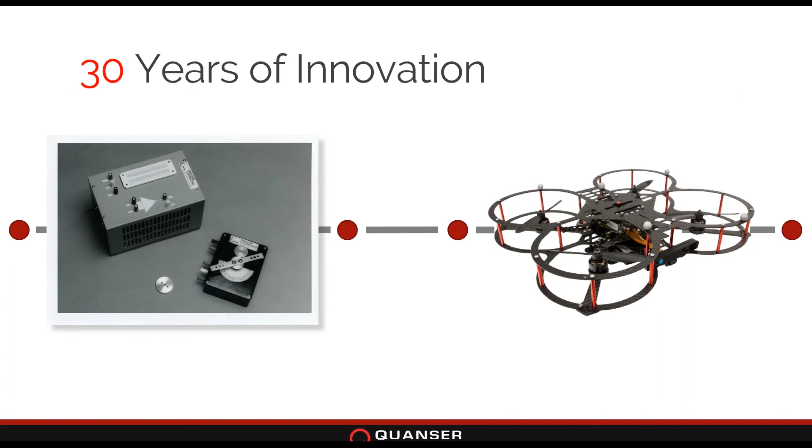That research approach has also been something we've been founded in, in terms of bringing these cutting edge advanced technologies to researchers, to give them effective validation platforms, to take the research they do, their algorithms, their new innovative approaches, and really quickly and easily implement them on hardware platforms without having to worry about creating unnecessary software platforms or tool sets or modules that don't really influence what they want to focus on, but give them the results they expect and are looking for.

And also a way to bring those algorithms easily to emerging trends, whether it be AI or machine learning or Industry 4.0 — things like that, where we're always trying to push the boundaries of what can be done quickly and effectively in the academic space, in terms of bringing in advanced technologies and adapting them to that academic focus to make these academically appropriate solutions.

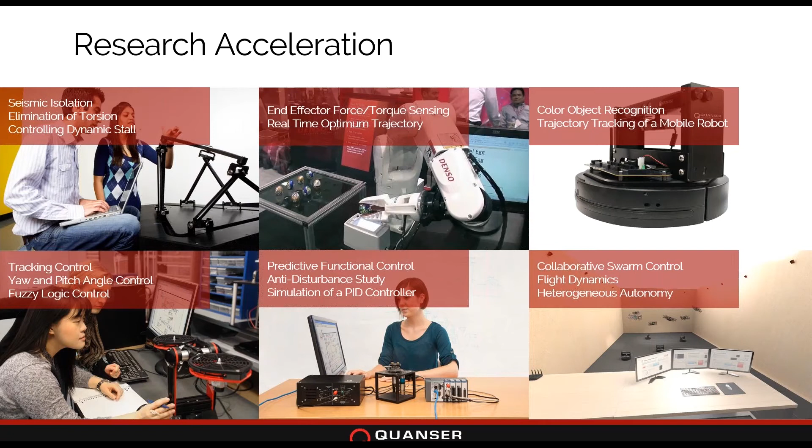But it isn't just in the research space that we push the boundaries. In the academic teaching space as well, we've worked with a lot of partners over the years to bring really advanced pedagogical methods to what they do in their teaching courses, whether it be bringing advanced hardware to early years courses, or new approaches to how content can be presented to different undergraduates in different ways.

I'll talk a little bit about that later on in the presentation, but even how you can change the whole structure of a course or program to really offer meaningful experiences for students, so that they can really understand and connect with the advanced concepts typical in day-to-day engineering life, but from the very early beginnings, so they understand and connect with what engineering is, and carry those experiences through not just their undergraduate career but into their future careers.

Being able to really understand what it is to do engineering and how theory and practical applications come together - this is something we've been doing all over the world for a long time now, 30 years. At this point, I think we're well over 3,500 academic institutions all over the world, with a similar number in the thousands of research papers that have been published using our technologies.

They're fully available on our website if you're interested in how we've had an impact on your particular field of interest. We have them archived and you can take a look through and see how people are using our products to push the boundaries of their particular research interest.

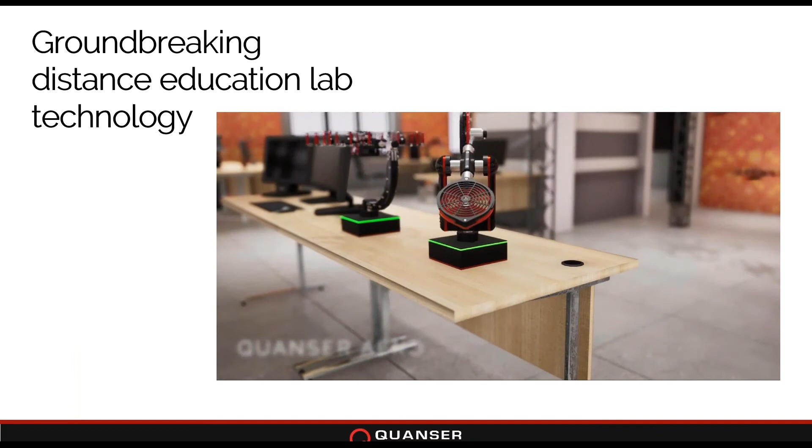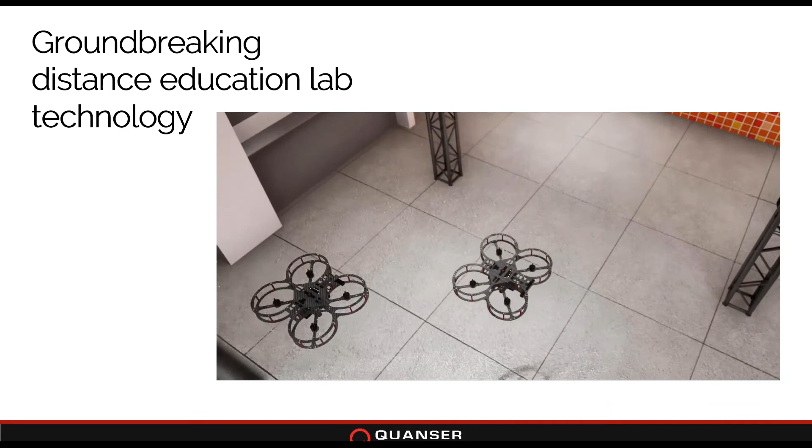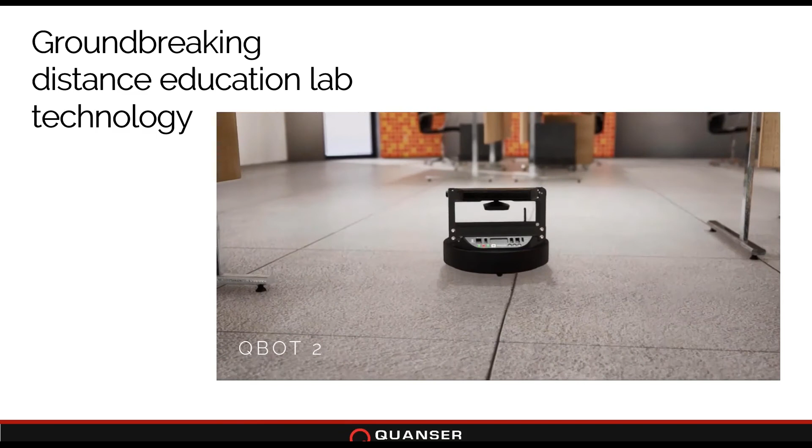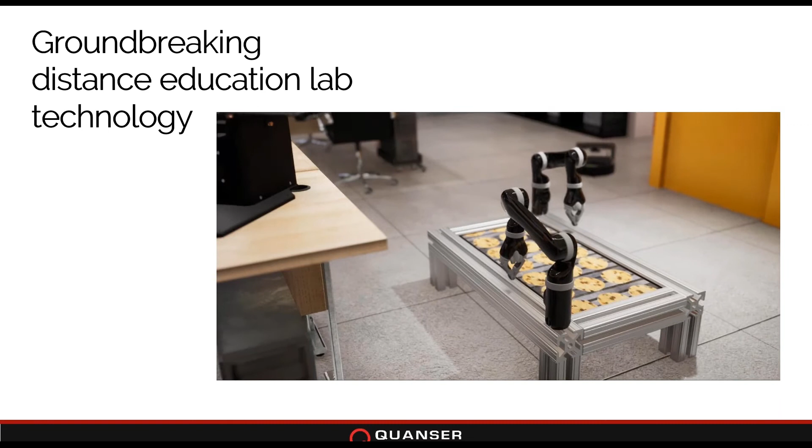The first thing we did was look at our virtual reality technology platform, Quanser Sim, which gives us the ability to represent our hardware very effectively in virtual and mixed reality spaces. Typically what we've done with this technology has been to represent how solutions can be brought together, showing our partners how they can leverage our technology to provide solutions to their students and researchers. But this was basically the most we'd pushed this technology platform. We had the ability to create our systems and work with them in virtual reality, to a certain extent hardware capabilities as well, and the ability to represent them dynamically, which was very important. But we'd never really leveraged this technology in a teaching context or used it effectively in the laboratory space or virtual laboratory space.

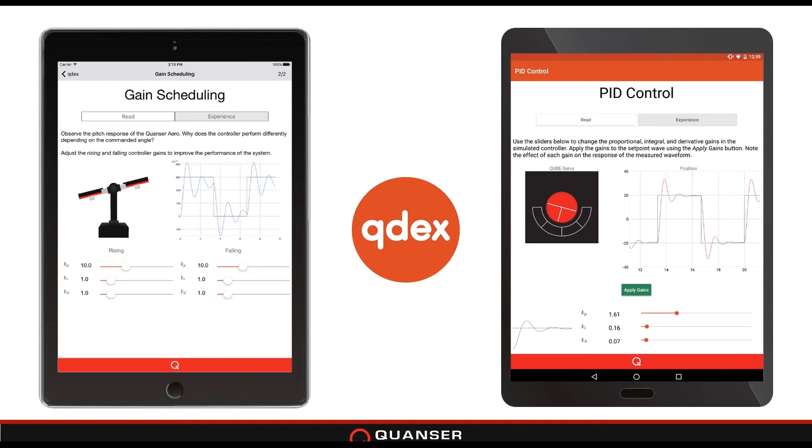The other piece of technology we'd worked on, something I've been a proponent of for the last six or seven years, was our QDEX platform, for bringing traditional engineering content to mobile devices in a really effective, interactive, and engaging way. It takes traditional engineering content and teaching materials that are technologically advanced and theoretically deep, and presents them to students in a context that allows them to understand and engage with those concepts, playing and interacting with them in ways they'd never thought about before, bringing understanding of how these techniques apply to engineering and to real world contexts like industrial applications. We had this technology ready to go, and had used it for a number of partner programs and courses, including building out our mobile textbook, which I'll talk about in a couple of minutes. But other than the mobile textbook, we hadn't really brought this interactive laboratory experience to our students or partners by leveraging this technology. That was the other platform we thought we might be able to leverage for this.

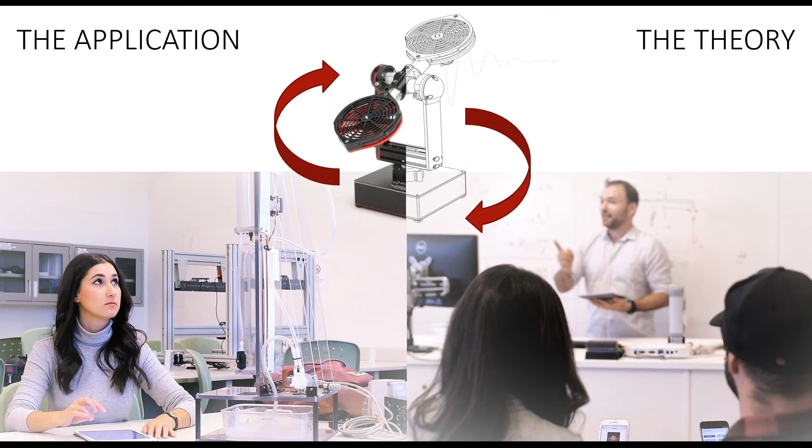Finally, how could we bring those together to do what we always do as a company, which is bridge the gap between theory and practice? That's what we always try to do with everything we create: bring together the theoretical foundations that are part of everything you do in engineering, and the application context of applying those theories to real world hardware, scenarios, and applications. We see how theoretical elements of modeling, dynamics, controls, and algorithms affect real hardware, and how that hardware changes the way those theoretical elements are applied and justify their functionality. So those were the ingredients we had available to bring a solution as quickly as we could to our partners, to address the needs that they had.

And finally, we had this experience controls platform that I mentioned, which was for us a legacy now of being able to bring really advanced and really exciting technological and teaching materials to students. Experience Controls is our control systems textbook that we released last fall, that allowed us to bring what was traditionally one of the elements of the controls course that we thought needed a little bit of a modernization, a little bit of a refresh in terms of how the content was presented to students.

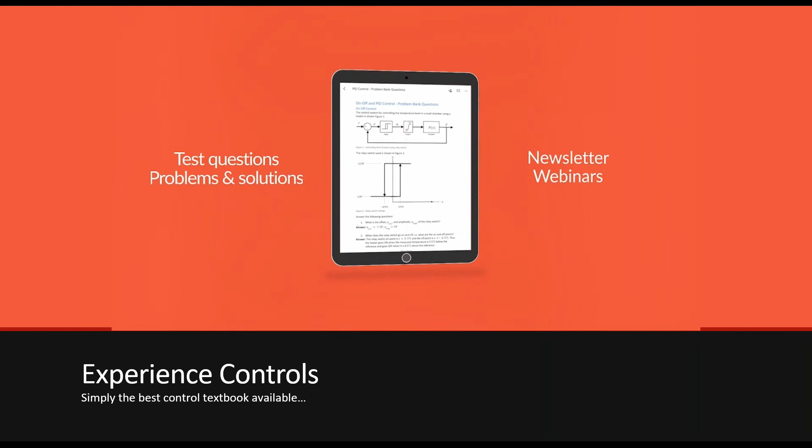So we took the traditional controls course textbook content and ported it to our mobile platform, really enlivened it, enriched it, made it much more interactive for students with simulations, with applications, with the ability to see how those theoretical concepts come alive in these applications. And that had been hugely successful for us.

We've seen over 4,000 student downloads and over 200 or 300 instructor resource downloads from this platform. And so we knew there was a hunger to have this ability to interact with theoretical concepts and really understand them in a meaningful way.

And so that was our foundation, that was our starting point two weeks ago, to try to bring something to the growing need that we were hearing from every available outlet exposed to our customer base, whether it be phones ringing off the hook with no one at the office to answer them, or emails. We know there's a growing surge of need for a solution that can bring those experiences to students in an effective way. And we had all these great ingredients that we knew we could use to deliver something as a really effective solution.

And that's basically the motivation behind what we've created. We've always worked with our customers as colleagues to stand by them and drive everyone towards success, whether it be their students or their researchers or our other academic partners, to be able to deliver something that makes sure everyone succeeds no matter the circumstance, which in these circumstances is a bit of a different challenge, but we had these abilities and assets we knew we could leverage.

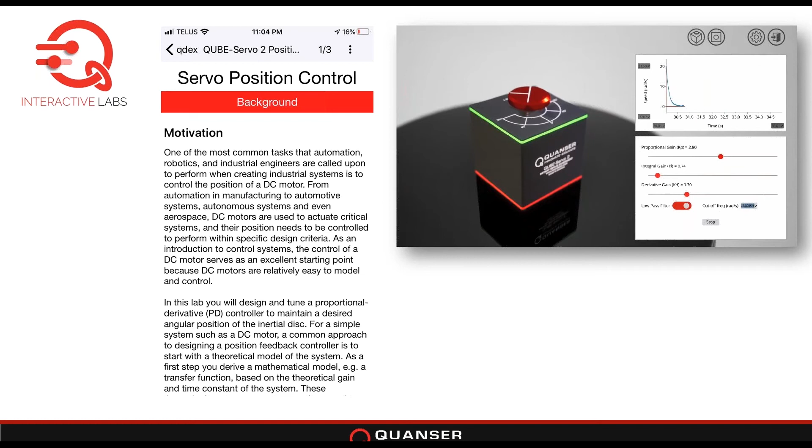We understand our systems very intimately, as you can imagine, through our very rigorous development process. As a controls and mechatronics company, we always try to create models and representations of our systems as effectively as we can, because we have such an intimate understanding of how our systems are built and how they behave.

We can really make these interactive and valid representations of how our systems behave, giving students that hardware experience without actually necessarily being in front of a piece of hardware, especially tuned towards the outcomes we really want them to have in terms of the control outcomes or curriculum outcomes.

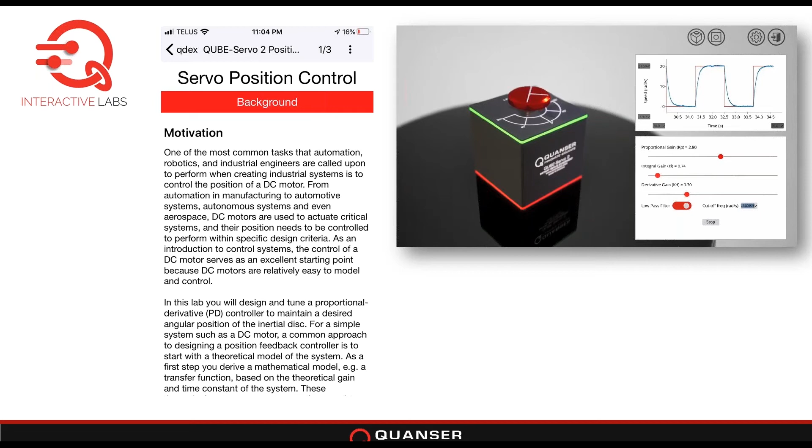We really believe we can effectively deliver some of those aha moments where students see the difference between theory and reality and the effects hardware has on theoretical concepts through this platform, because we've created curriculum that really emphasizes and showcases how these hardware techniques really influence the theories they understand from other resources.

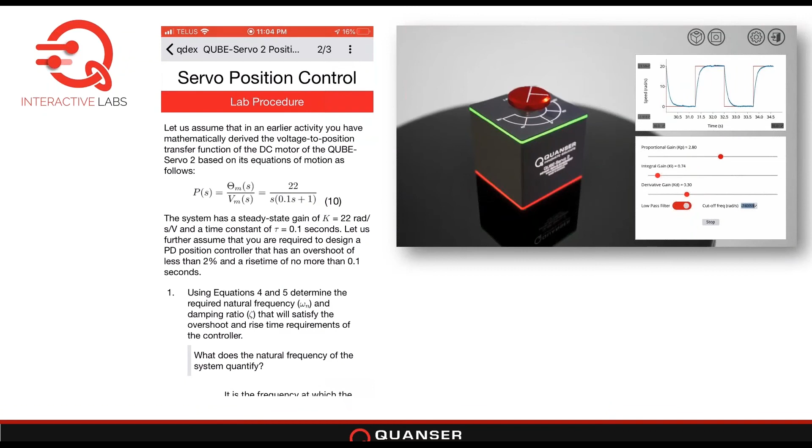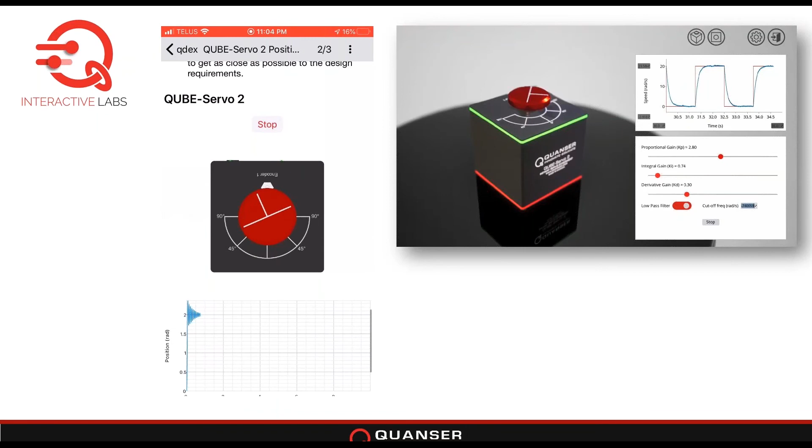And you can see here on the left, we have almost exactly the same experience also on mobile, where they can interact with the curriculum. They can see check-your-understanding questions to make sure they're really following along and understanding the material presented to them. We have assessment questions, so later on they can start to build a lab report showing how they brought those concepts together and understood those outcomes I mentioned.

But then they can interact with a representation of the hardware exactly the same way as on Windows, and hopefully more or less exactly the same way as on actual hardware.

And this really gives them that experience on either platform, across the platforms, and also being able to give students who might not necessarily have PCs or high-end software systems at home the ability to, on their phone, interact with these systems and have these learning outcomes without necessarily needing to be on campus to even access the expensive IT resources that are typically there.

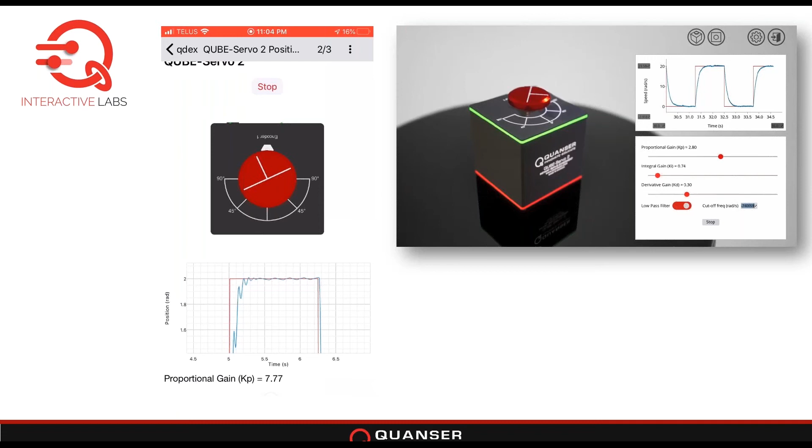And so this, combined with our traditional curriculum, which is fundamentally important to what we do, we've tried to build a complete solution, not just, as you can see with the laboratory experiments that we've built up in terms of being able to do basic controls for modeling position and speed control.

But also an aerospace context for how those controls are applied to aerospace systems with our Quanser Aero. Things like PID tuning, gain scheduling, how PID gains are compared to more advanced topics like state space control. We've built up this collection of bespoke material specifically for this.

This is not the traditional content or curriculum that we create for our other products. This is specifically designed for this context, so we emphasize how hardware influences these controls topics, and that was something we really wanted to consciously do to really make sure that the outcomes that students are getting on this platform are aligned to the outcomes that we would want them to have in a traditional context. And so we've really tried to emphasize those.

But then also, as instructors ourselves, we wanted to also deliver a complete set of instructor material to our partners. So we have solutions for the assessment questions that we have available, implementation guides in terms of some of the ways that you can use this platform for your particular teaching context, and also lecture slides, because we always find that being able to tie lectures to laboratory activities really makes a more continuous and effective presentation of concepts to students.

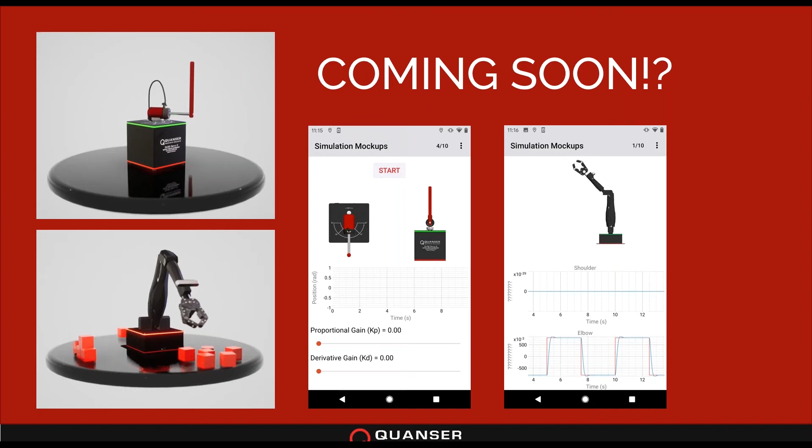From there, again, we have over 80 products, and we'd love to hear from you what you would like us to bring to this platform to address the needs you have and the needs you're seeing in your community, to bring a platform that has a basis in need and a basis of being able to deliver solutions you can see being effective and something you can use immediately for your teaching activities.

So finally, I'll close this part of the presentation in terms of why did we create this platform. First and foremost, we wanted to provide something as quickly as we could to manage the overwhelming set of requests we're hearing from the market and our partners, to deliver something that meets your current need today, right now.

And also something that's scalable, because your needs right now might be for something that has a large audience. So we want to deliver something that is immediately useful, and from there we'll build up the platform to address more needs over time. But right now we just wanted to have something available that you can use today.

At the same time, use it as a starting point. Leverage our content delivery mechanisms, our simulation and virtualization IP, and bring all of our technology foundations together to give these experiences in the context of a very introductory undergraduate laboratory experience, but grow from there. Perhaps offer experiences where researchers can start to use more accurate, more interactive, more open and complete experiences for their topics.

But then also being able to grow from the undergraduate context and the research context to other products, other fields. All these systems I've shown you, the mobile platforms and virtual platforms, are underneath complete authoring environments. So we have the ability to work with partners to create custom solutions as well, both on the mobile side and the virtual side. We'd love to hear from you if you have opportunities or see needs in that respect.

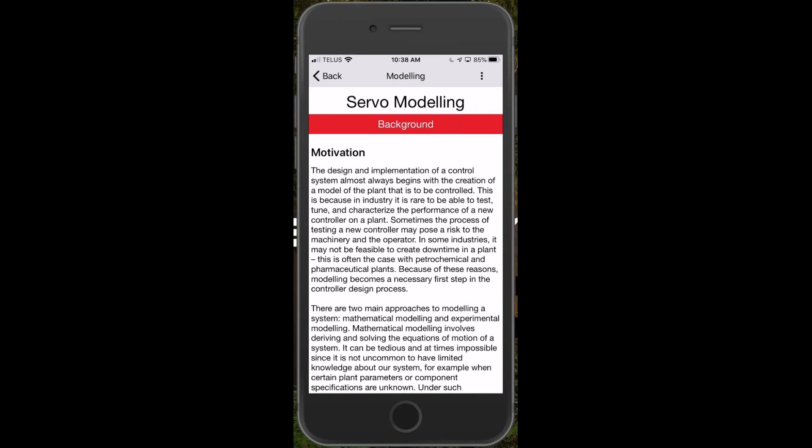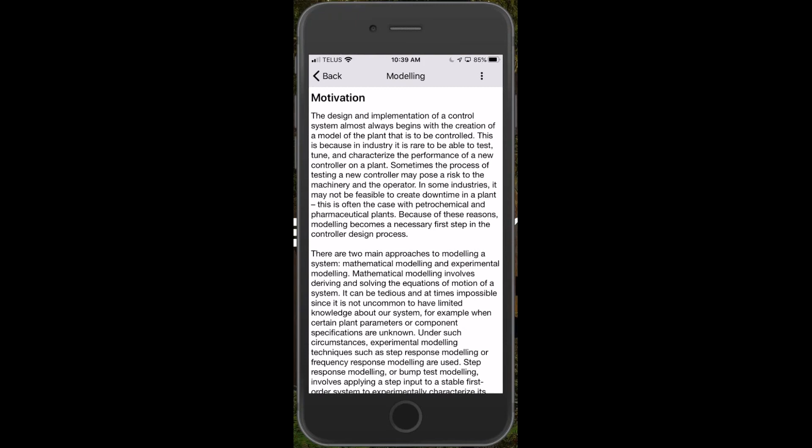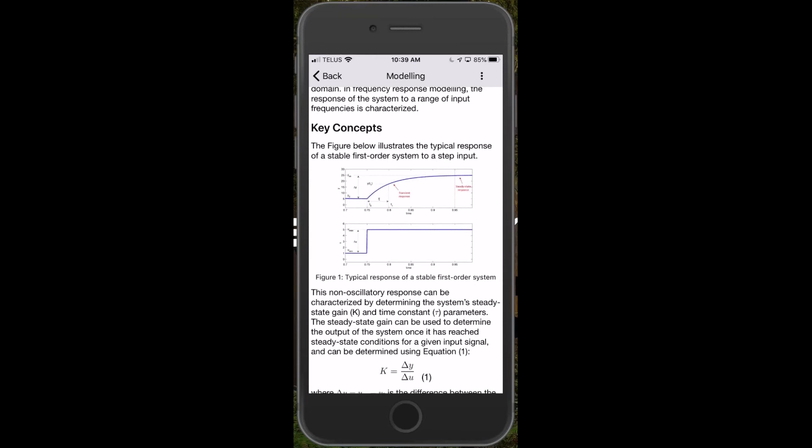Again, we start with motivation. All of our curriculum always starts with motivation. Motivation is a hugely important part of how we see engineering pedagogy. We really want to give students upfront a feel for what the point of this particular piece of material is. Why are we learning about this concept? How will we use this in the future? So we always start with that context in terms of the motivation behind this particular theoretical concept.

We talk about some of the main key concepts and system diagrams that are going to be in use in this particular laboratory experience. This material has been custom designed for this, and also designed in a context where we expect this to be used alongside material from another resource, whether it be a traditional textbook, online resources, or hopefully our experience.

We expect this to really be sort of an introduction or a refresher on these concepts, just so they can check back with what the main elements of what they're doing are. But for a deep dive into the theory, find another resource, hopefully ours or hopefully one of yours, to get that really deep understanding of how these theoretical concepts are applied.

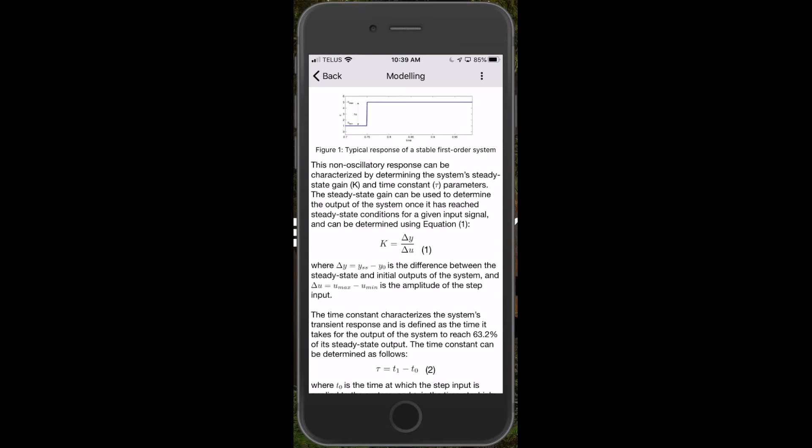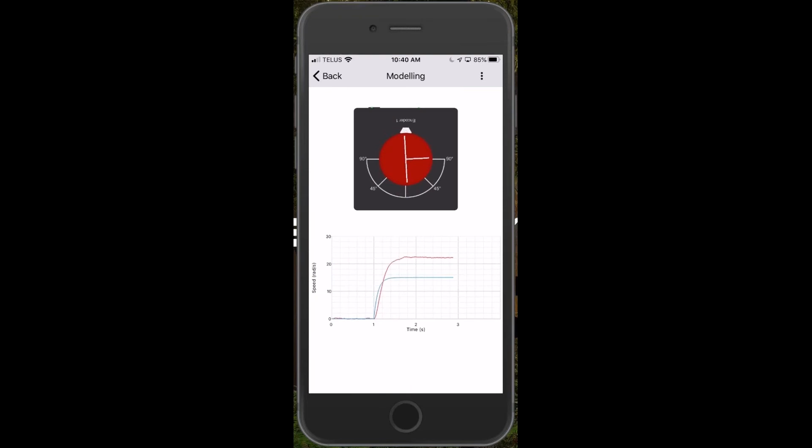But then very quickly we'll jump right to the experience, right to the simulation, where you can run the simulation and see the response of your system. As you can see here, my red response is the actual system, and the blue one is my theoretical gains. I can tune that, run it again, and hopefully get a little bit closer.

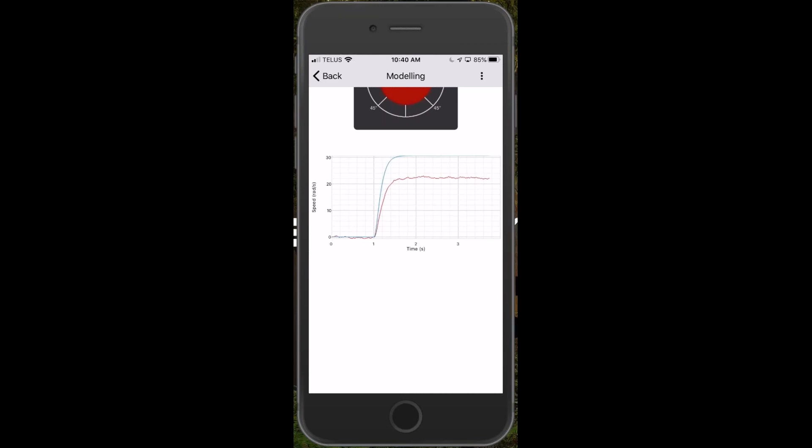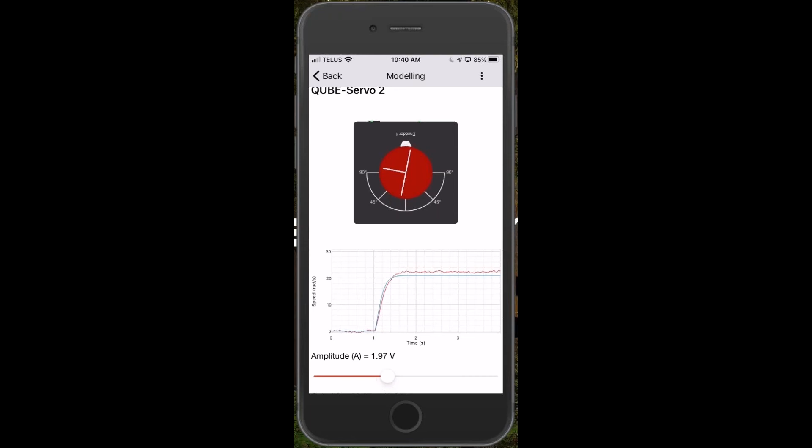As you can see, I overshot quite a bit, but basically now I'm interacting with this real system. I'm building my theoretical model to try to match this actual piece of hardware, in quotation marks, I suppose. And from that, I'm starting to understand how modeling comes together and how modeling can differ from real systems, which is the main outcome we want students to have with this activity.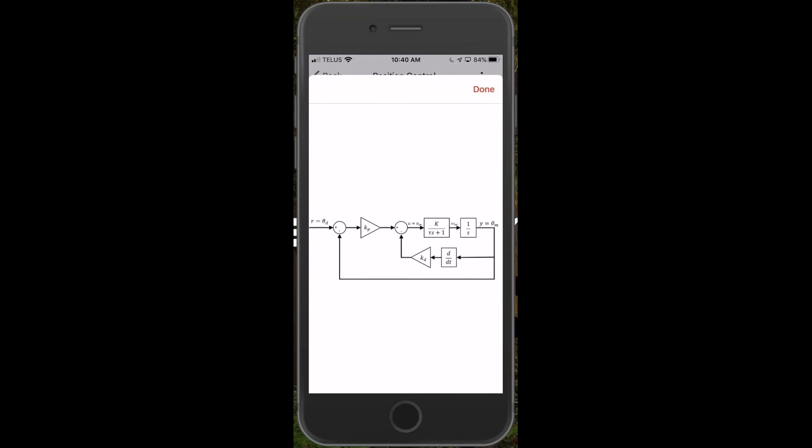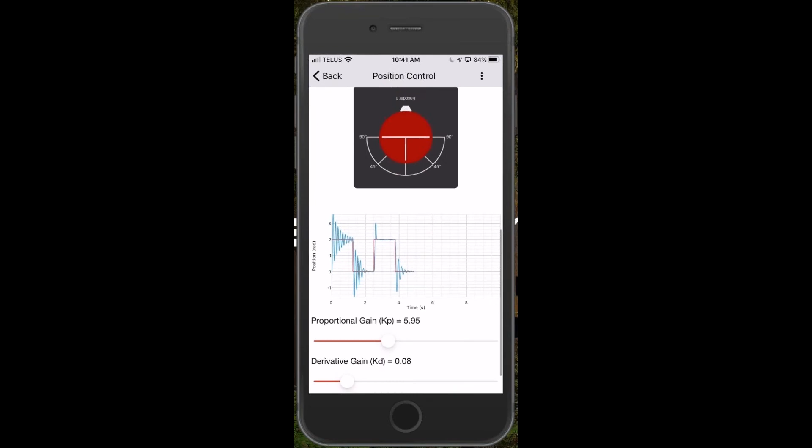I'll jump one more time quickly into position control, again starting with motivation, covering key concepts, elements of block diagrams and things like that to show how the system is actually architected, but then flipping immediately to the experience of being able to interact with this system and actually build a controller to try to effectively control this type of system, and also being able to show how modeled responses compare to actual responses.

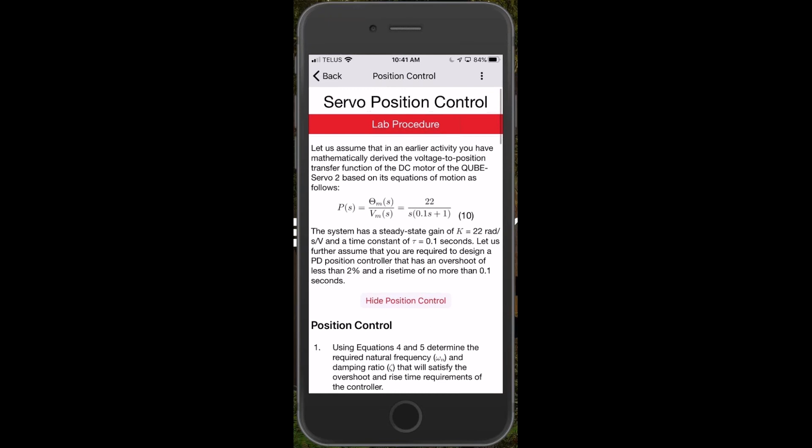And then if you look here, I can actually go through a check-your-understanding progression and see, did I observe what I was supposed to observe with this? Am I starting to understand how these different elements of the platform and elements of the questions and the interactions affect those theories? And then finally, the assessment questions, where you can actually create long-form lab report style assessments and submit those to your instructors.

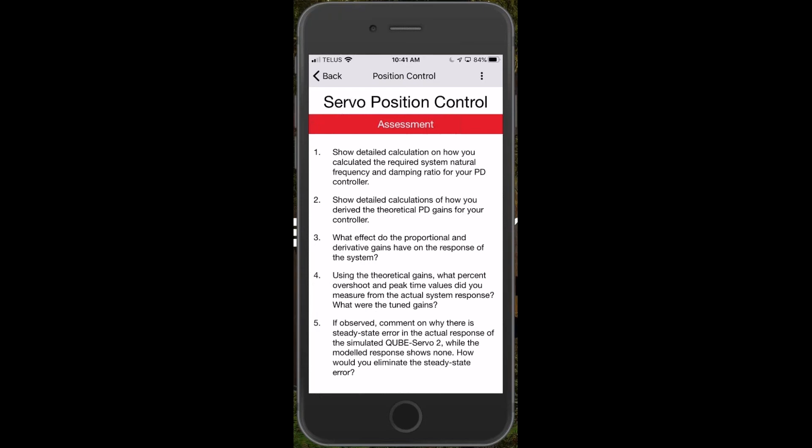And hopefully in the future, that will be a little bit more integrated to really make that a simple and straightforward process as well. And with that, I'll flip to Paul Karam, and he can show you the Windows experience.

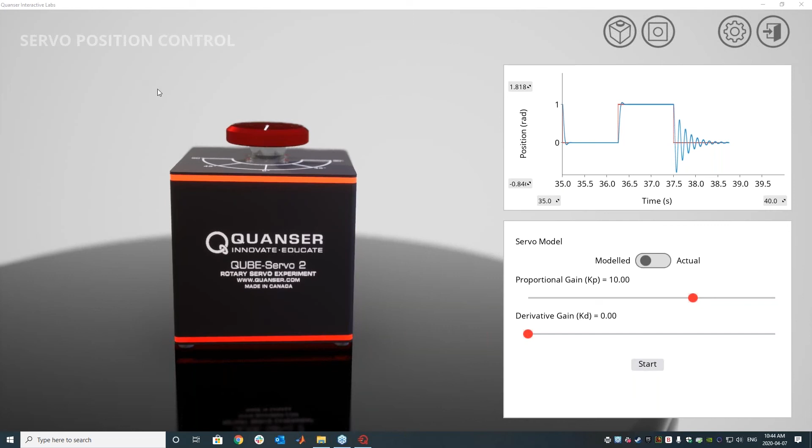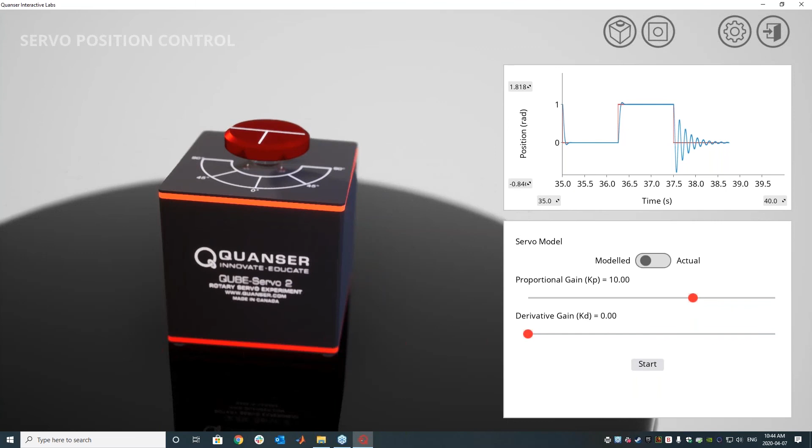So just to continue with what Peter was demonstrating, this is the Windows side of the application. A little bit different in terms of look and feel, but the content, the expectation, everything's the same. Here is the position control lab, basically tuning a PD controller on our servo motor. You can see on the Windows side it is a full 3D engine, so you can pan, tilt, and zoom around the experiment itself.

In this case, I'm really interested in the position of that load disk, so I'm just going to go ahead and start my experiment. At this point the students have been guided to come to this part of the lab, trying this based on a simple model - you can see I've toggled the model here. What's happening in the background is it's running a full simulation of the theoretical model, a simple second order model of our QUBE-Servo, and right now it's applying a PD controller to it. Hopefully you can see the ringing on the plot - I'm not sure how well that's coming through the video stream, but trust me, once you download the application you'll see the full fidelity of the experience on Windows, which we definitely want you to experience as well.

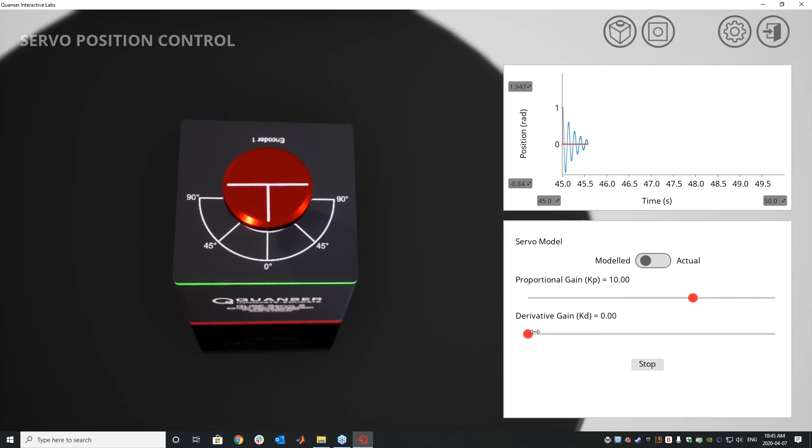So right now I'm just going to keep increasing my derivative gain to dampen out that ringing and those oscillations, and get it to a point where it behaves quite well. You can see this behaves well on my model device.

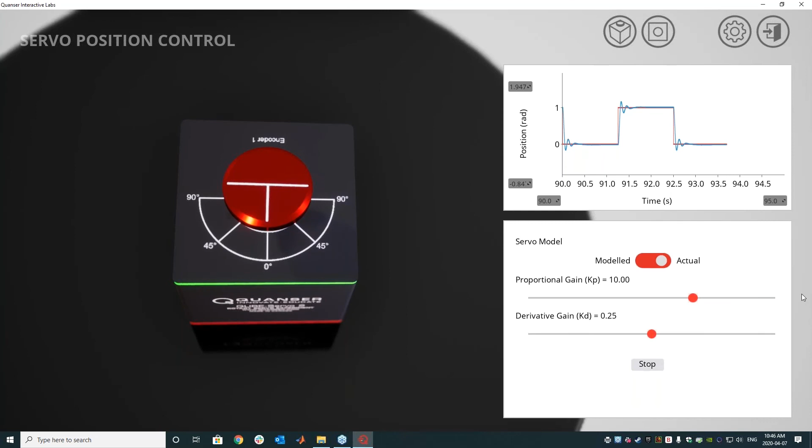Then the next step of this lab, or this experience we're providing, is we ask the students to now try it on the actual device, quote unquote actual - and this has more nuanced dynamics. Like Peter mentioned, we know our systems very well; we have them completely modeled to a fairly deep degree. So part of this now says, okay, these are the nuances between a model and the actual system, and then how do you develop your control system to be robust and able to handle these unknowns or uncertainties? Once you base a control system on a model device, how do you bring it over and try it on the actual system, what are the differences, and how can you account for those when approaching any closed-loop control problem.

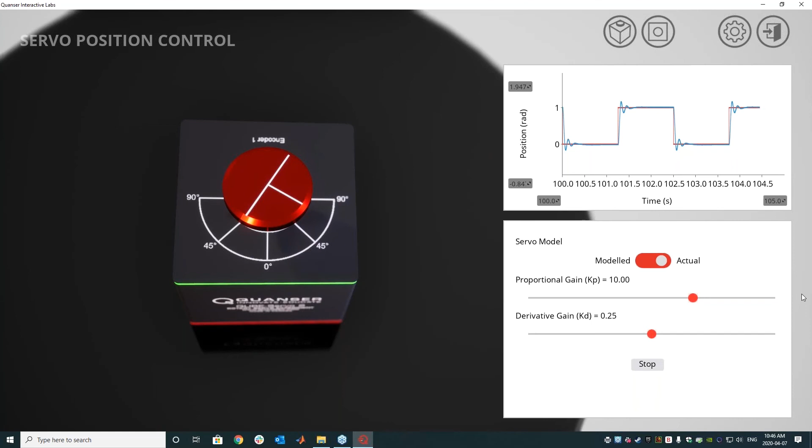And with our buttons you can try different views, and again the student is free to go around and take a look at the system itself. This is a simple system, but as we get more complex with things like the arm, the pendulum, and the Aero system that I'm going to show you right now, there's more rationale to go around and see it. So for example, here we will show you on the Aero.

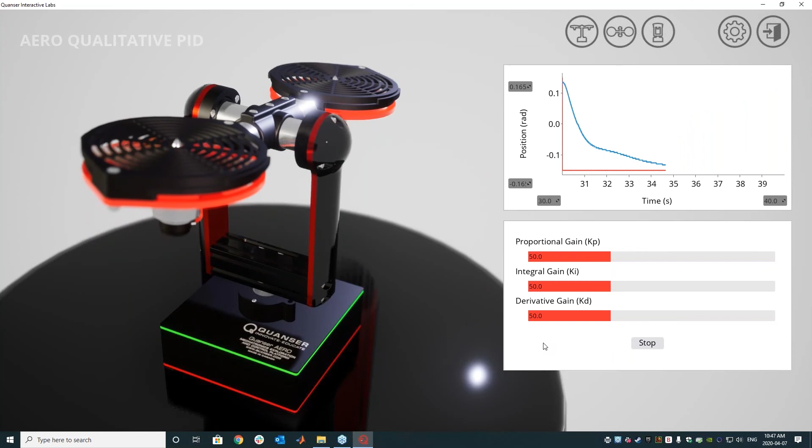This is a more complex dynamic system—a MIMO system, quite coupled in its dynamics of both pitch and yaw. The experiment walks the user through modeling the system and then compares it on the actual plant, looking at traditional control versus more modern state-based approaches, and really examining the benefits of one versus the other and how you can leverage more information over your system to get it to behave.

This is again a simple example, and it gets progressively more complex. For example, if it's not reaching where I want it to go, I can just increase my integral gain, and that'll account for that discrepancy.

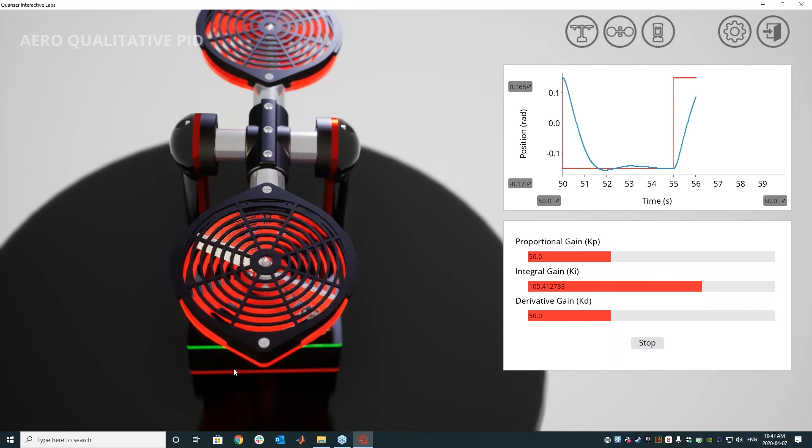So this is just one of those examples we saw. Our goal right now is that by the time we have the complete solution over the next couple of weeks, you'll have about 12 different lab exercises around the different platforms we'll be providing, each ranging 1 to 2 hours per lab experience for the student. Obviously they can continue coming back to really solidify their understanding while interacting with the content and these experiments themselves.